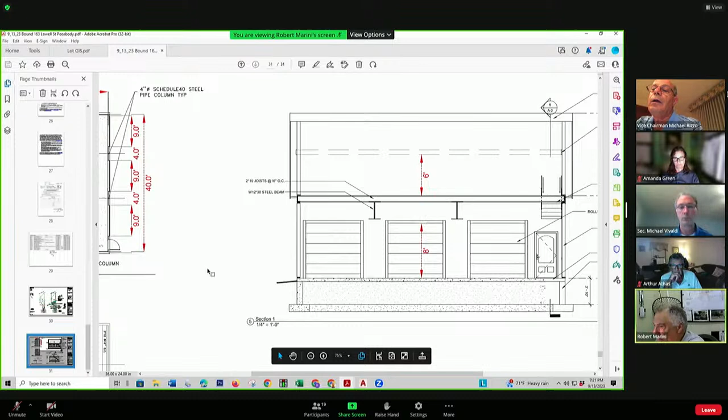Are you going to have roof gutters on the front and back side? No, there's no gutters, but basically it flows down and hits these stone fringes. Okay.

So I guess my only question about that is, in nice weather that would probably work really well. I'm just thinking about in the wintertime when there's snow on the ground, the ground's frozen, and you have some kind of storm event—that water may not get into that stone, those bleeder stone trenches, and could run across. My concern is whether it's running across to the neighbors on either side.

The neighbor on the left wouldn't really get it because there's actually a wall behind there that would direct the water towards the back. But the one on the right—is there a curb or something along that fence line on the right-hand property? Over here? Yeah.

Not that I can recall. So I think you're doing all the right things. But I don't know what would happen in spring thaw when the ground's frozen and you get a heavy rain, if that water's going to go right across into the other property.

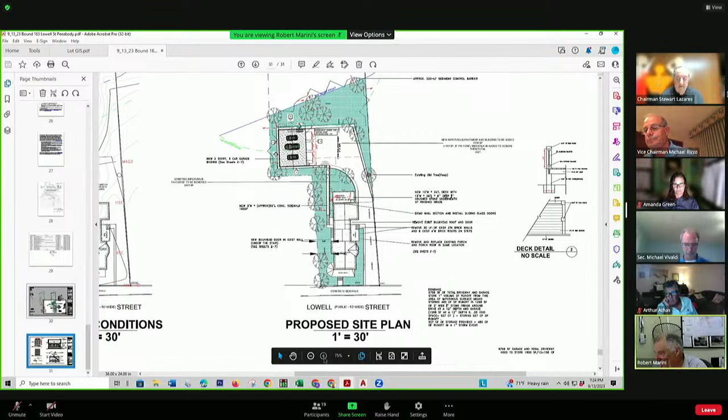I don't know, lately the frost depth hasn't been more than a foot. So what size gravel are you planning on using? 3/4 inch stone, that's basically what they use to surround the Cultec chambers.

But typically what we figure is it's holding 33% void space of the volume. So if you have a chamber and an envelope around it, the chamber's holding water and the volume of the stone around it is holding 33% of that volume. You add it all together at the end. But I just figure stone would work here.

Fine, I could add some grades. Yeah, because when the snow's on the ground and those voids are filled in with stone and then the ground freezes, it's not going to do the job if it rains in the middle of the winter. Anytime in the spring, summer, and fall it's going to do exactly what you said. But I would question if it's going to be okay in like a spring thaw in the middle of January.

Spring thaw wouldn't be bad, but if it's totally frozen and you get a rain and it's iced over, that might be the same thing for a catch basin. The frame could be iced over. It's always best to handle drainage on the surface and not do subsurface drainage, because then you can't get at it, you don't know if it's clogged.

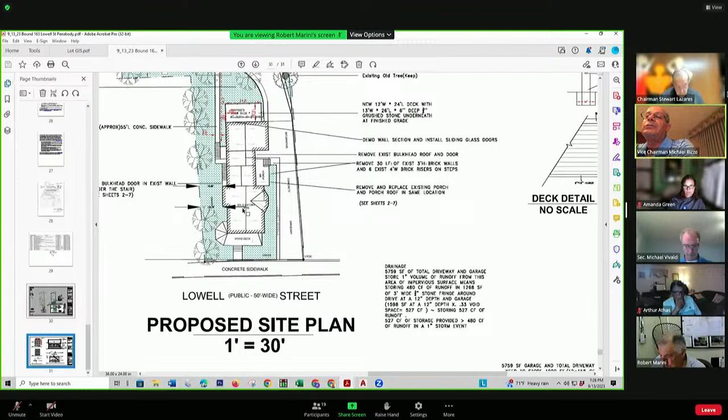Yeah, so I think the grading is what's going to be important. I think you need to provide some grading that identifies and shows that the water's being directed not to either side of the abutters, but directed within the driveway and adjacent to the driveway on the left side and running down to that grass area in the lower area.

So direct the grades away from the garage, away from the neighbors' properties, and then direct it down. It's downward anyway, and it's going to these green areas. It very well might be that the current grades are doing that now, mostly creating that flow.

Yeah, but I'd like to see some proposed grades that identify it. So when the guys are doing the driveway and setting that pavement, I wouldn't want it pitched to the neighbor on the right hand side. I want to make sure it's pitched towards the back, and it can be level at the garage.

It can be leveled, but you need it to come out into the driveway, out in front of the garage, and then move down. So you've got to do a little grading plan that shows that when the guy does the paving, he's going to pave it that way, so it's not all being pushed over.

Yeah, I could add some grades to this. In fact, this line here I'm pointing to is kind of where it meets the existing pavement. And then from there down, establish grades here and base it all around, out, down, and then to here. And then it'll spread out and fill the voids as it needs.

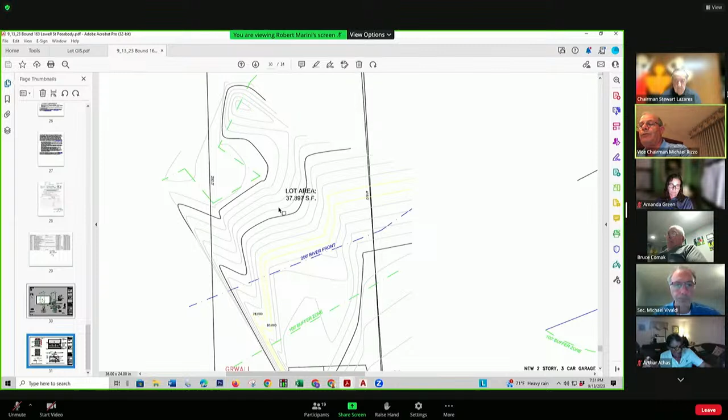The issue there is any kind of drainage of fuel or oil would impact the ground. Not a problem, we want to prevent that. That could definitely be done. And as we talked about, since you're in some buffer zone there, you can mow the grass and spread some grass seed on the bare spots, as long as you don't fill.

When I see a Bobcat on somebody's property, I get nervous, so if you need to do something back there, you need to come back to us for a permit. Correct, yes, that is correct. So they can plow - they just can't use the Bobcat to plow snow and store it there.

I guess the concern was they can't store it on land that's pitched towards the back. They would keep it in the garage, or they can keep it in the garage and in the wintertime bring it out for snow removal, then keep it in the garage, or find another location for it.

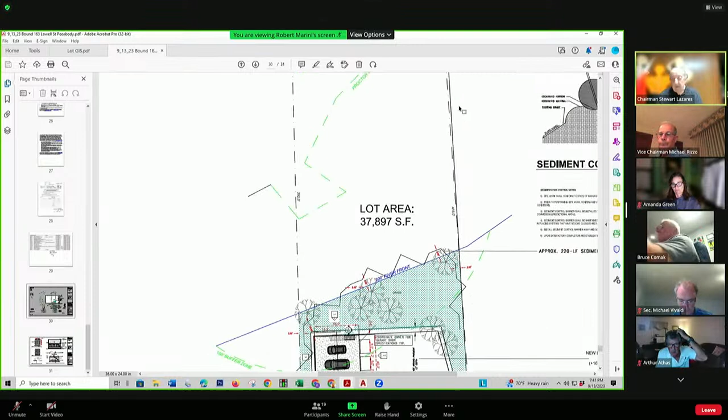My only suggestion is, again, if it'll help avoid runoff, could you somehow trench that area and fill it with stone in front of the boxes? I was thinking of doing that. In other words, surround the boxes with stone, then at least we've done everything we can. And then pitch it, right?

Yeah, pitch it to the back. Show grades, because we're going to be showing proposed grades anyway. Add some grades here, and then show this triangle, this long triangle, this stone here. It's not going to look that great, but with the boxes in there, there's some green. Well, it'll eliminate mowing.

Yeah, but in order to put the boxes, they put underneath gravel, they put wood under, and then they put boxes. So they changed the water flow. But what I'm suggesting is that we do some contouring of the land in front of the boxes and fill that contour with gravel to direct the water flow away from Lowell Street towards the back of the property.

That would be wonderful, if it works, we're fine. But we want some way to fall back on this, if it continues to be a problem and continues to have more or as much water flowing through, because I'll have to add, we had that runoff and washing away of mulch way before all these rains. We had a very dry spring, and it was washing away then.

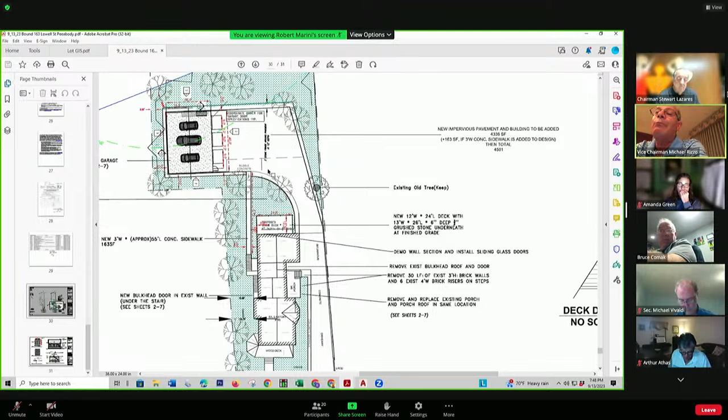Okay, and then the driveway, the big open part of the driveway, be graded such that from the street side, or the part of the garage that's closest to Lowell Street, that whole section with the higher spot would be the edge of the garage, and from there that would all grade back to the grass in the back, but not to the buffer on the right. It's just that it'll be level at the garage opening. Then when the guy paves it, he's going to pave it such that it's kind of like almost like super elevate down in a way, and that can all be shown with contours and grades.

So you're saying, if there's a peak on the roof of the garage, so it's going to be pitching this way. I just wanted to capture it. We could do a combination.

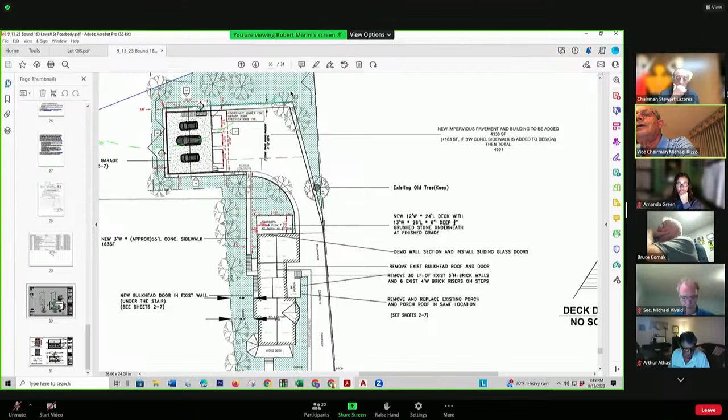So if it's frozen, get it to the swale here, and then end the swale so it dissipates and broadens out. I don't want the whole driveway pitching from the building all the way over to the right-hand side of the property to get to a swale. I don't want that. I want the driveway to pitch to the back.

So you're gonna - exactly. Why don't we do this? Why don't we have two swales that kind of meet here, you're like in the middle. The thing is that's working the buffer zone, so I was trying to avoid that.

We have the stone trench, and the trench is essentially a swale, but it's full of stone. So that's grading this way, and it stops at the middle. So that way, Mike, you don't have a long flow line. It gets to here, and then it diverges to this combined swale.

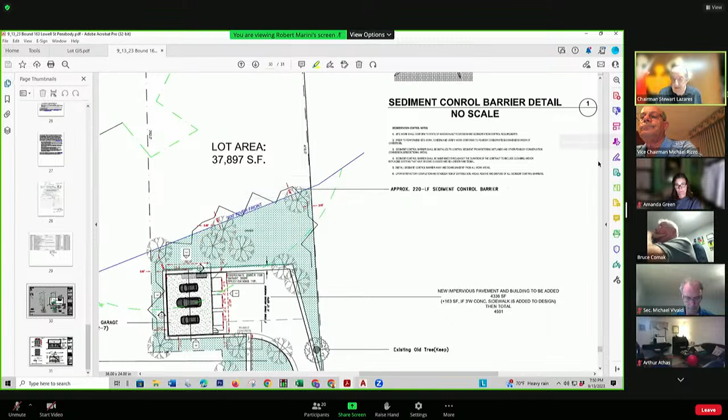Again, the intent is to keep the water flow away from the neighbors. However you pitch the driveway or the swales, it shouldn't send water cascading over the wall to them.

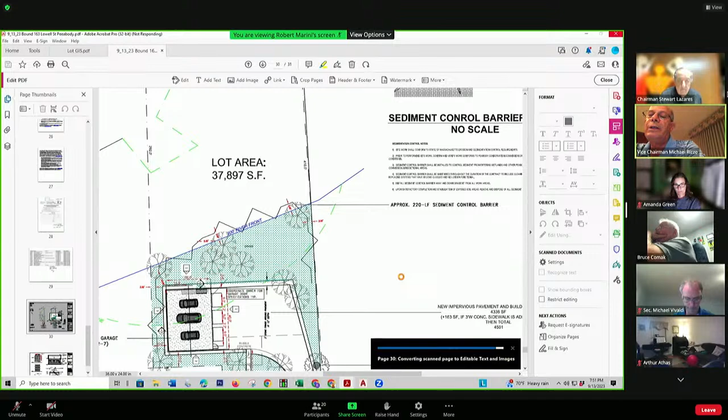So not to keep belaboring this, if you're looking at the edge of the driveway on the triangle side, where the triangle is smallest, heading towards Lowell Street - if that point was elevation 10, going down the driveway you got 10, 9.9, and these grades are just a number: 10, 9.9, 9.8, 9.7, 9.6, 9.5. So at the back corner you're at elevation 8. Along that whole back side it can be elevation 8, and everything from the garage, the front right-hand corner to Lowell Street, those grades are around 8.5, pitching back to 8.

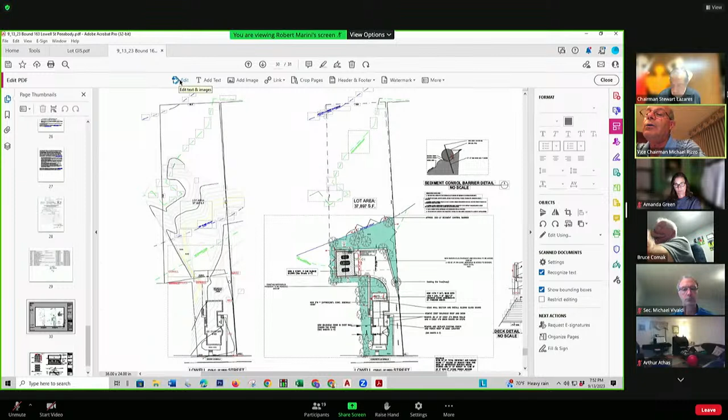Okay, so nothing's going to that triangle. The only thing that's going to that - everything's coming from the triangle. From the triangle, it pitches into the driveway. From the driveway, it pitches in towards the driveway but runs to the back of it. So you're not directing any water purposefully to the right to get into that triangle. Not a drop of water is going to fall and go straight back - it gathers here like this. It's not a big deal, I could just add some grades.

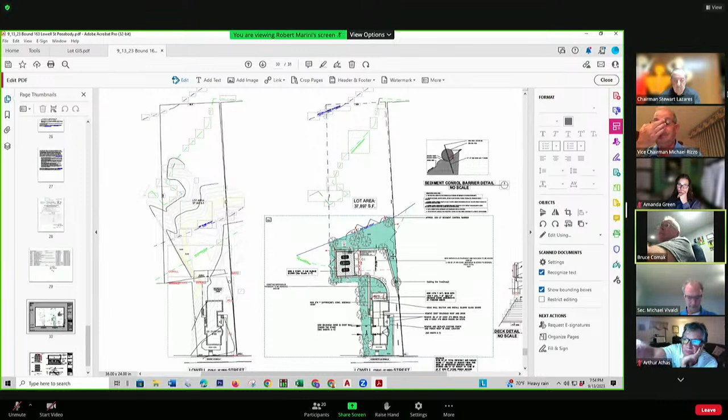And I just want to make sure this is going to be contingent upon - because Lucia's right, it's the people next door, it's contentious, they don't want any water flowing on their property. Again, I don't think it's a big deal to get the water to flow down the driveway and away from their property. I don't either, but that being said, why can't we just wait one more meeting?

Everybody looks at it, and then remember, somebody's going to have to do an as-built on this one to make sure that the elevations are correct. Because you can say yeah we're going to do it according to this, but who's going out to inspect it afterwards? So somebody's going to have to do an as-built to say okay, yeah, it was done per plan.

Yeah, well, that'll be Rob's job to make sure that it's built right. But I'm okay with waiting - I'm certainly okay waiting one more meeting so that gives Rob time to work this out and get a plan to us. Exactly.

So we leave the public hearing open until the next meeting, and then get a motion to continue this meeting until October, correct?

Through the chair, before you make that motion, which I'm supportive of, I'm also supportive of closing it and issuing a contingent order. But if you're now having him make a swale, is he removing the stone around the driveway perimeter?

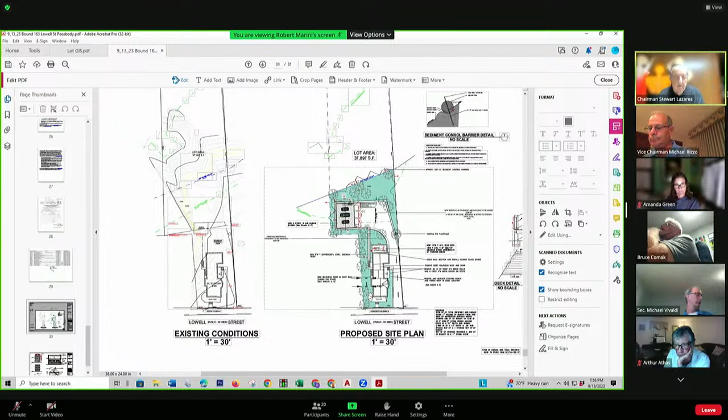Thank you. Okay, where are we? Okay, thank you. You're welcome. Thank you. Dun, dun, dun.

13 agenda. I think items 5 and 6 are going to be continued. Item 5 is definitely continued if you want to read it; Attorney Kelty did give me a continuance letter. I believe for number 6, 60 Pulaski wants to give a quick presentation, because it's been on the agenda and he wants to let you guys see it. Then if you have any issues, he doesn't have to go back to the drawing board after peer review. Okay, sounds good.

Item 5, public hearing on a notice of intent submitted by Attorney John Kelty for Farhat Group, owner of the land, and applicant AGA Foster LLC. Proposed work is redevelopment of a former leather factory for a commercial storage building. The property is known as 47 Tremont Street, map 75, lot 165, Peabody, Mass. We got a letter to continue this, correct?

I'm looking for a motion to continue. Motion to continue item 5 to our next meeting. Second. Roll call: that motion was made by Mr. Rizzo, seconded by Ms. Green. Chairman Lazares, yes. Vice Chairman Rizzo, yes. Secretary Vivaldi, yes. Commissioner Athas, yes. Commissioner Comak, yes. Commissioner Green, yes. All right, so that is continued to October 11th, 6-0.

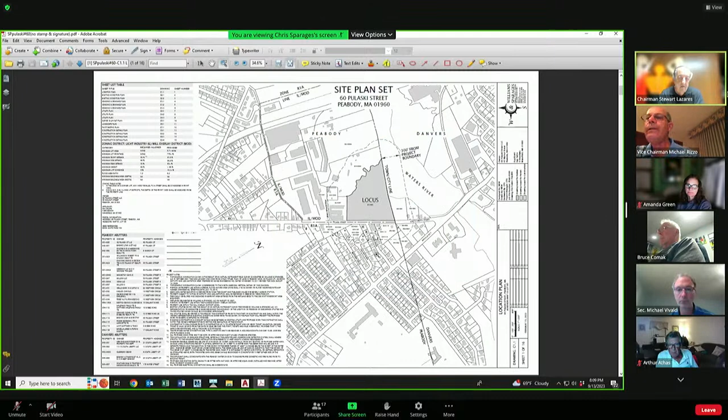This is the locus—the property is right on the Peabody-Danvers town line. Across the street is Dobbs Road, and we have industrial and other commercial properties abutting us on both sides. There's also a rather large residential neighborhood; if you go down Dobbs Road a bit, there are single family homes down here. Just wanted to give you a rough idea of where we are. This piece of land is about 6.7 acres, currently zoned light industrial, and it also has a mill overlay district over it.

It has frontage along Pulaski Street, quite a bit of frontage. You may recall we were in front of the commission back in 2022 with an ANRAD where we confirmed the limits of the wetland resources. That happened back in March of '22.

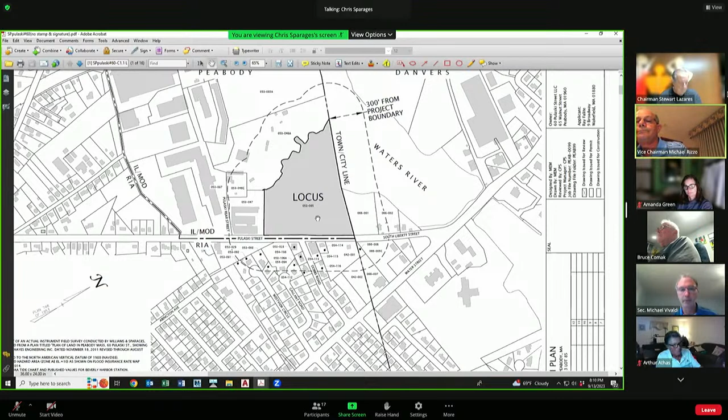This property historically has been used as a slaughterhouse, rendering works, fertilizer company, and tannery. The uses go back to the early or mid 1800s based on our research. Most recently, if we go back just before the year 2000, the primary building was on the property.

If I zoom out and go to the next plan, I'll bring up what we're proposing to do as a quick guide. There was an old building, and there are still remnants of it in the back of the property, that burned back in 1998. But the property is in really rough shape.

There's debris and construction debris throughout the property. It's in really rough shape. We characterize the property as degraded in many ways.

We also have evidence that the operation, the rendering works along the Waters River, is considered to be a historic mill complex. We had a building on the property that existed prior to August 7th of 1996, and it was a manufacturing operation that used water for transportation. We submitted a picture dating back to the mid 1800s showing the factory with a tall ship parked out on Waters River.

So it's got quite a bit of history, and what we'd like to do now is try to redevelop it. Part of the history, towards the latter part when it was used as a tannery, resulted in some contamination on the property, and because of that there have been several evaluations and environmental site assessments.

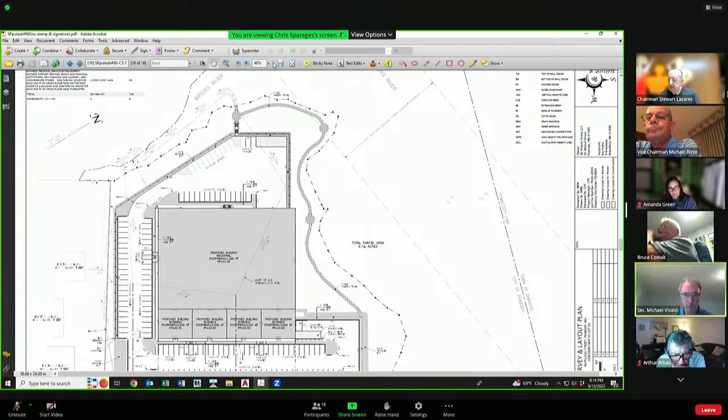So that's a little bit about the existing conditions. Just to refresh your memory about the wetland resources, since that's why we're here before the Conservation Commission: we're on the Waters River, and there's also an intermittent stream that comes through the property from drainage on Pulaski Street on the north side. We also have a bordering vegetative wetland along the Waters River.

Waters River has a mean annual high water line that we established when we did our ANRAD, determined by elevation since this is a tidal river. We have that information shown on our plan.

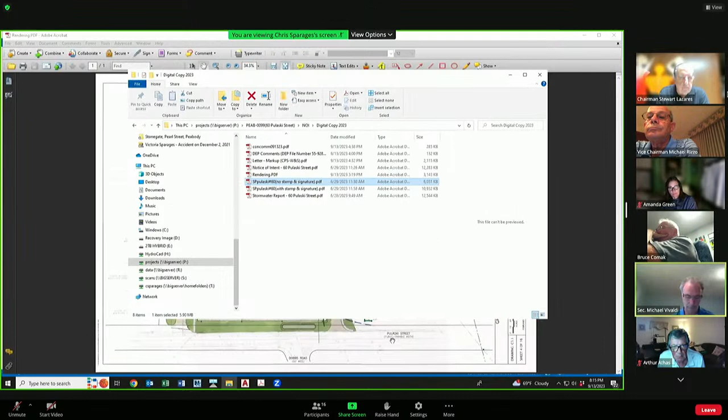If we continue going upstream a little bit — let me change my screen — can you see the color drawing now? Okay, so on this color rendering, the green line I was tracing on the other plan is the limit of the bordering wetland. You can see the edge of the mean annual high water, at elevation 4.1, a little further out — that's this blue line.

We're also in an area that FEMA has designated as a special flood hazard area. It's a tidal situation, so it's a coastal wetland resource area known as land subject to coastal storm flowage, to elevation 10. We've also shown that on the plan as a coastal flood hazard area.

Can you make the screen bigger, please? Sure, let's zoom in a little bit here. I'm a little confused, there are a few lines here, right? The blue line at the upper left, is that a river?

Let's start with the colors, the furthest ones away. From some survey maps, this light blue line is considered the thread of the river on some old plans. That's in the water, so we don't really pay attention to this one. It was just a line shown on some survey plans.

Then we have a darker blue line, this dashed line. That's the actual edge of the mean high water, so that's the edge of the river, if you will. And of course, that edge of river has a riverfront area associated with it that extends 200 feet from this line. You can see coming way back into the site here, that's 200 feet from that mean high water line.

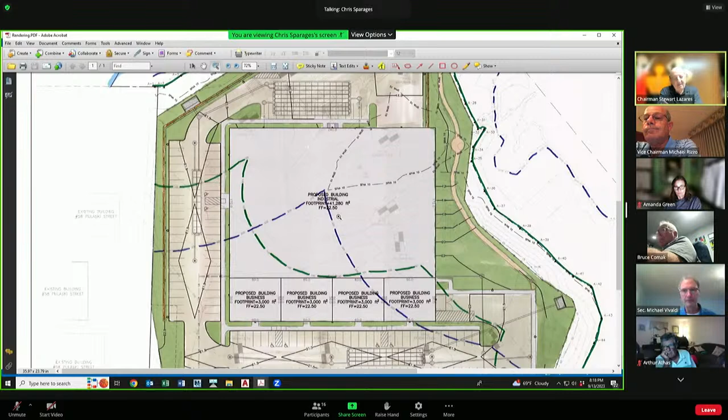So the only other thing I wanted to mention about the existing condition has to do with the status of the riverfront area. Now, I mentioned before that we believe we're exempt from the Rivers Protection Act because we're designating this property as a historic mill complex. But even though we're saying that, we are doing our best to honor work in the riverfront area.

You'll see what I mean when I present the extensive riverfront restoration plan that we're proposing for this property. The riverfront area is very much degraded, but we're proposing to clean it up and revegetate it with native trees and shrubs, and I'll go into that in a little more detail.

So the proposal is the plan that you see before you. It involves removing all of the old debris and junk and construction materials that are strewn throughout the site, especially within the degraded riverfront area.

And then the proposed development involves a commercial building. It's this gray square. At this time, the mill overlay district allows us to have multiple different types of uses, but for now, what we're proposing is an industrial use and about 41,280 square feet of the building in the back. Out front, you can see these 4 squares of 3,000 square feet of space for proposed business uses in the front of the building.

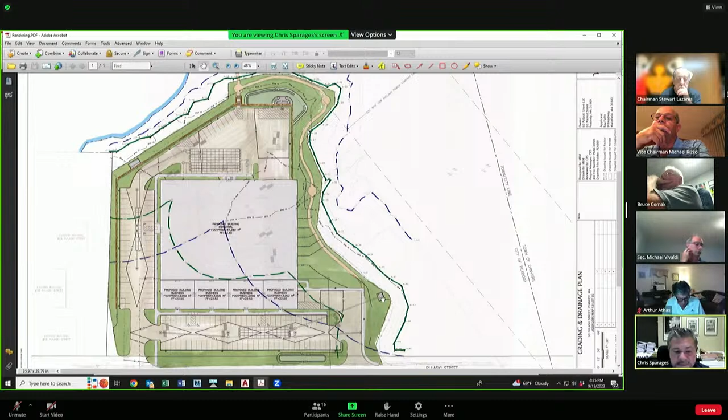In addition to the main stormwater management areas, we have to get the water there. So the rest of our system includes other best management practices, typical things you see on other projects: deep sump catch basins, sediment trap forebays—that's this guy here, where the water falls in first before going into the rain garden. Then at our discharges, we have a couple of them here, and over here we have large level spreaders designed to handle the rate of the water coming out. We actually size the rocks to make sure the water coming out of the pipe doesn't move them all over the place.

So that's my quick presentation—hopefully that was quick enough for you. I'm here tonight to answer questions and ask you what you think about what we're proposing here.

Thank you very much. I think that your presentation was excellent. You covered a lot of areas and questions and supplied answers that were relevant.

I have one question: just because it is in a neighborhood, is there any plan to put solar panels on the roof?

Let me take a step back. At this time, we don't know exactly who the tenants are going to be, and in terms of architecture, that design detail hasn't even been thought about yet - in other words, how we're going to heat or provide electricity to the building. So I'll bring that question back to the owner of the property, who's also the developer, and we'll see if that can become part of the project.

I assume you're asking because you'd like to see the project use solar panels if possible. Yeah, I think the future is going to require alternative sources of energy from what we currently have, and electricity plays a big part in it. Admittedly, at this point, my understanding is you can generate electricity from a solar panel, but you have to store it someplace, so your system would require battery backups and the ability to hook up to the PMLP grid, supplying power to them or taking power from them as needed. But I think it'd be important for the environment if we could incorporate some non-fossil fuel means to generate electricity.

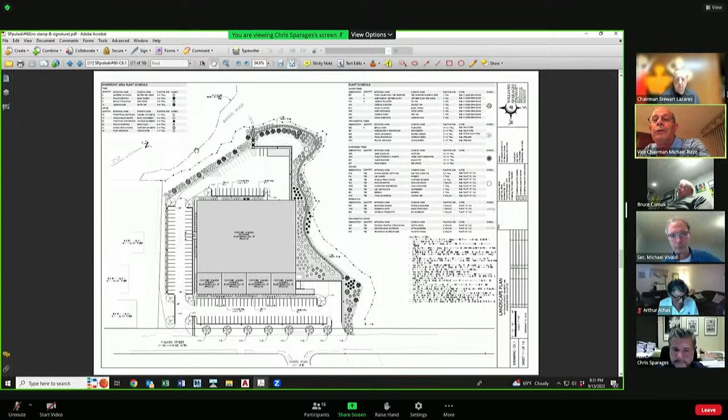So in the spirit of that, if you go back to the other drawing, the color drawing, you can see it better with the blue line where the canoe launch is. To the left of that, I don't see any public access, and to me every foot of access to the ocean for our city is important. Is there any way we can do something so we can enjoy all that footage and not be cut off with that back section?

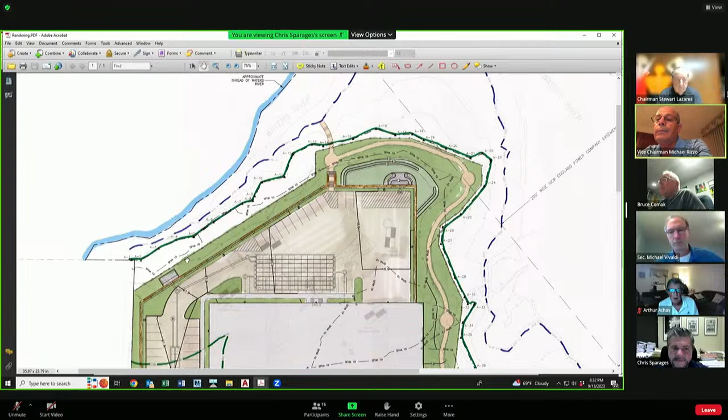Sure, so you're talking about this area, obviously. Yeah, yeah. So I will bring that back to the team, I understand why you're asking. It's relatively flat in there too - we kind of picked the path to follow a relatively flat area. So let me go back to the owner and see if they'd be willing to extend it into this area. Okay, and hopefully connect it back to Pulaski Street.

You mean to do a loop, if you will? Yeah, well, find out, because I think it's important. I haven't asked for the sand beach yet and the palm trees, but as we get... so as we haven't...

That was a good presentation. Thank you. But we haven't discussed whether it's our duty to try to restrict any construction in the inner or outer riparian zone for the river. But certainly demonstrating, helping to provide an opportunity for the public to have enjoyment and some use along the water there. With regards to regulations, I'm just not positive at this time what the rules are for inner and outer riparian zone disturbance in the floodplain and this tidal area.

But I certainly am thrilled to see something starting with that. Maybe at the next meeting we could get more into the regulation that explains what you're doing. Sure, I'd be happy to. We do think long and hard about this stuff. It takes a lot of time and effort to put together a plan set like this. Yep, I know we don't take it lightly. We believe we have very good arguments to explain how we comply with the regulations. We'd be happy to do that. That's great.

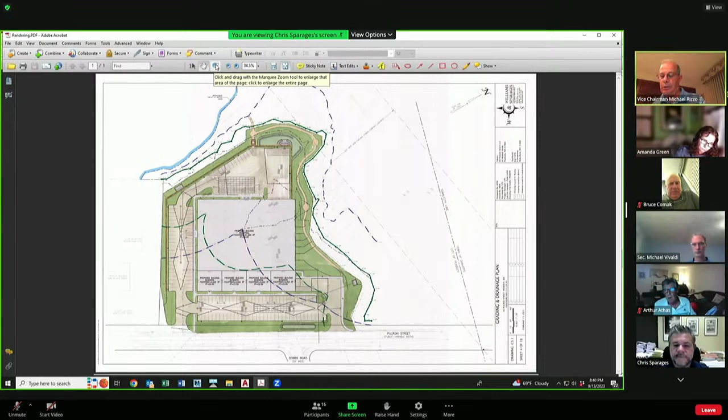I'd like to make a motion to continue this to our November meeting. Seconded. Roll call: the motion was made by Mr. Rizzo, seconded by Mrs. Green. Chairman Lazares, yes. Vice Chairman Rizzo, yes. Commissioner Athas, yes. Commissioner Comak, yes. Commissioner Green, yes. Secretary Vivaldi, yes. Okay, great, 6-0.

Thank you, Chris. All right, we'll see you soon. Thank you.

Moving on, let me get this up. Number 7, I believe, right? Item 6, request for determination of applicability. 6, 7 - we just discussed 6? No, 7, yeah, we just discussed 6.

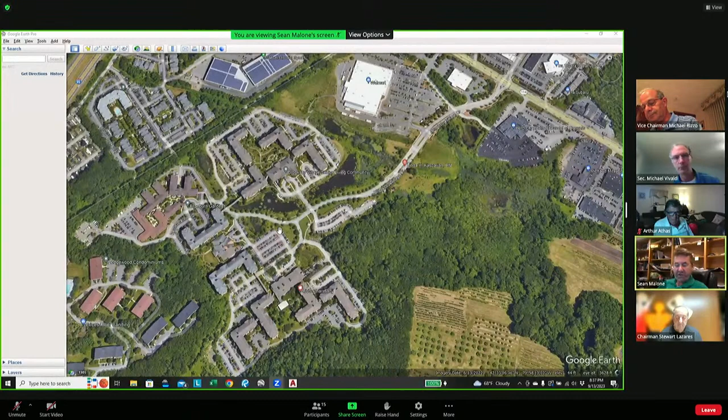This is Brooksby Village - I'm sure a lot of people, if not everybody on the commission, is familiar with it. It's approximately 90 acres, with approximately 16 buildings featuring various care options: independent living, assisted living, and nursing home facilities. The site was constructed with a couple of wet basins - this one here is known as Upper Basin, this is the Lower Basin. The water flows, stormwater flows into this basin, weir-controlled underneath this bridge crossing into the Lower Basin.

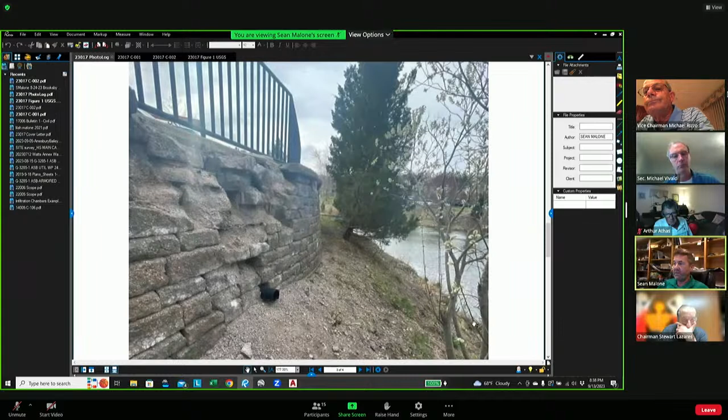So obviously, we want to fix this as soon as possible to prevent a more catastrophic failure, which could then push sediment and debris into the pond.

So the proposal is to remove this existing wall as well as the concrete sidewalk surrounding it. As a first order of work, we'd install a sedimentation barrier around the limit of work. This would consist of a compost filter sock as well as a silt fence backing to give a good solid barrier. All the work would be done from this parking lot area. We don't anticipate the need of any equipment going down into the grassed or vegetated area, so all work would be from the paved surface.

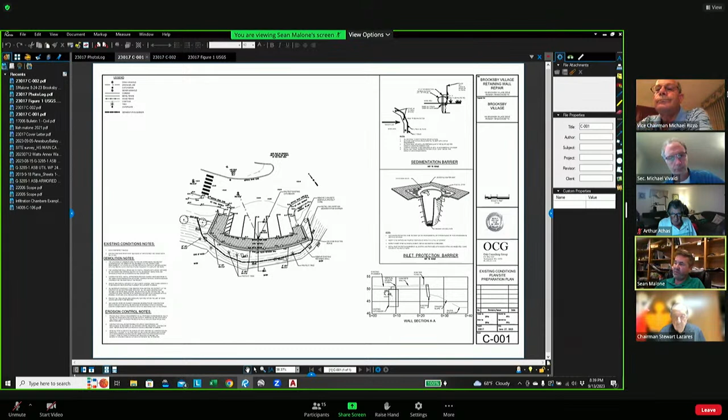Just a quick section showing there's about a 5-foot high wall here. We would then propose to rebuild the wall in essentially the same footprint. It's actually a little bit smaller footprint when we straightened out these walls, so we're a little bit less impervious area than the existing condition. The wall would be constructed and then infilled, and the concrete walk and fence would then be replaced, again, all work occurring from the high side.

We'd be changing the wall material from that small block that was disintegrating to a larger gravity wall. These blocks are about 4 feet wide, 2 feet high, and really give a good sturdy, robust wall that'll be durable. Another attractive thing about this type of wall system is it can be constructed very quickly. You don't have to worry about tie-back geofabric. It's place the blocks, get all one layer set, backfill, and keep on going. It's kind of like building Legos, if you would.

The total area of disturbance is approximately 2,000 square feet. We do anticipate we'll have some disturbance of this vegetated area on the low portion of the wall, just to construct the wall itself, and that's reflected in where the sedimentation barrier is located. But after the wall is constructed, we'll reloam and seed all disturbed areas and cover with a biodegradable erosion control fabric rated for the steeper slopes.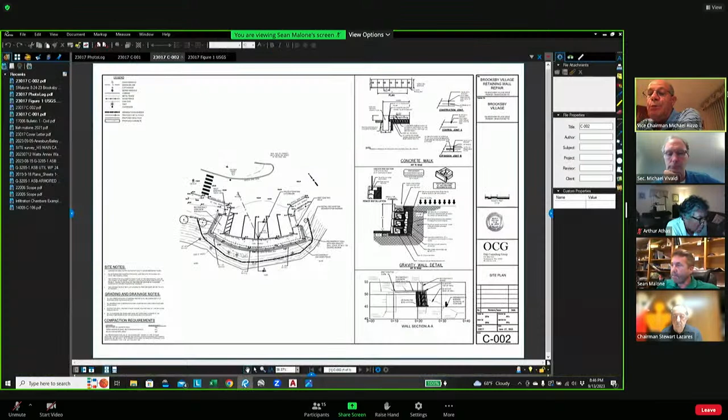Clarify if I'm incorrect, but those blocks have cavities in them that are filled with stone, and then the next piece goes on top of that and it's filled with stone too. So the wall is actually permeable, meaning any groundwater from behind the wall can get through. It's not like a gravity wall holding water back. It works great, these types of walls are awesome. That's exactly right, Mr. Vice Chair. This section shows the stone backfill in between the blocks.

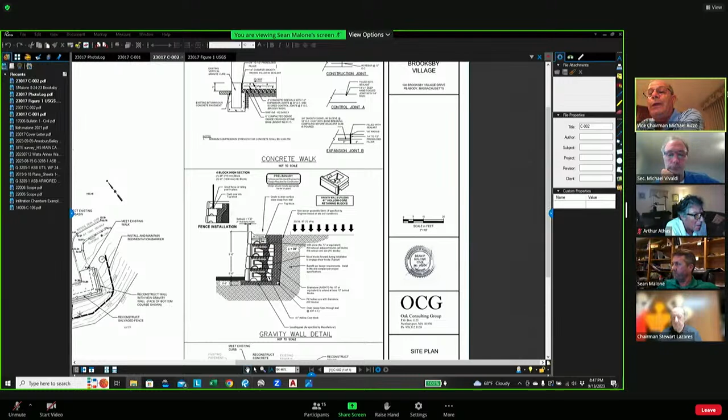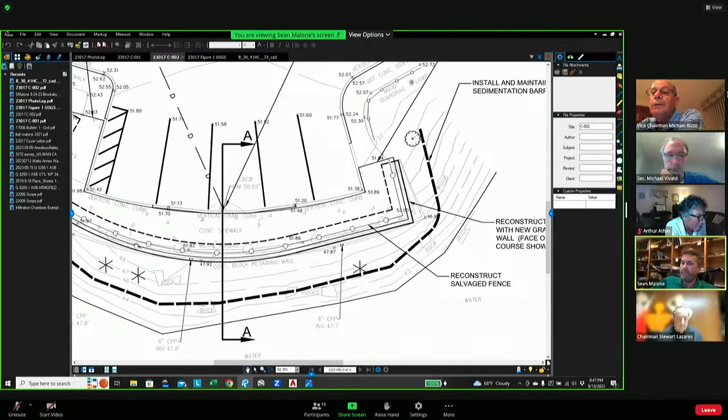Excellent. Will there be, at the back side of it where you'd be parking, a guardrail along there so people won't drive over? There is not a guardrail present. There's a fence, and the sidewalk is approximately - there's a vertical granite curb, and the sidewalk is about 6 or 7 feet wide, then you've got a fence along the edge of the wall. Okay, very good. Yeah, these are nice systems, they work really well.

Anybody else on the commission have any questions? Is there any information, anybody from the city? Any comments and staff comments? I don't know of any. There should be a memo from Mr. Langley in the OneDrive, and then I gave you guys 2 recommended conditions.

We have 12 to 18 inch on the filter sock diameter. You could double those if you wanted to - you can put one behind the other and double up. Yeah, that'd be good.

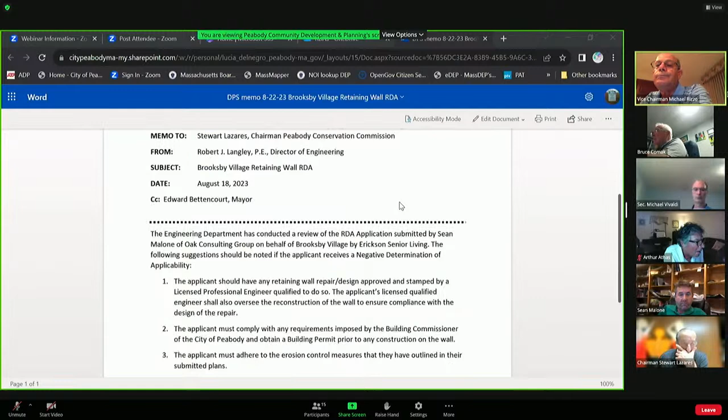So I pulled up this plan that has been on the OneDrive probably since like August 18th. So we'll just include these comments. The recommendation is that the applicant - there should be stamped plans signed by the engineer, plans by a licensed engineer.

And you have to get a building permit with the building commissioner and the engineer, and erosion controls. So we just got the erosion controls covered. We use 18-inch erosion controls. We'll double up one behind the other and include the comments from DPS, and we're good to go.

Through the chair, there's no silt fence? I think there should be a silt fence besides the log. Yeah, Mr. Commissioner, our detail shown on our plan does show the log backed by a silt fence. We saw both. All right, so including a silt fence.

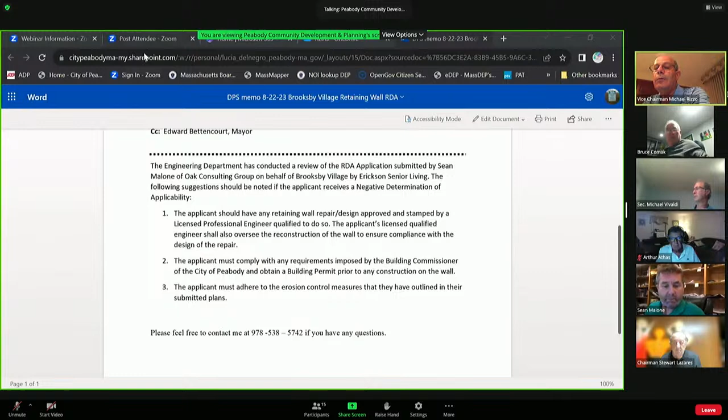Do you mind sharing that again? I'll stop sharing if you could share that detail again, just so that we all know that it's there. Sure. And then I just had two recommended conditions, and they're extremely basic.

It was about the erosion control. So whatever you guys want to word it, they need to be inspected and approved before work can commence. The erosion log should be the larger size of 18 diameter if feasible, or if you guys want to do the 12, and if there is the silt fence, if you guys think that's acceptable, that's fine as well. I just think 12 inches is really not that much. Once you get rain and weather, they smash down pretty fast.

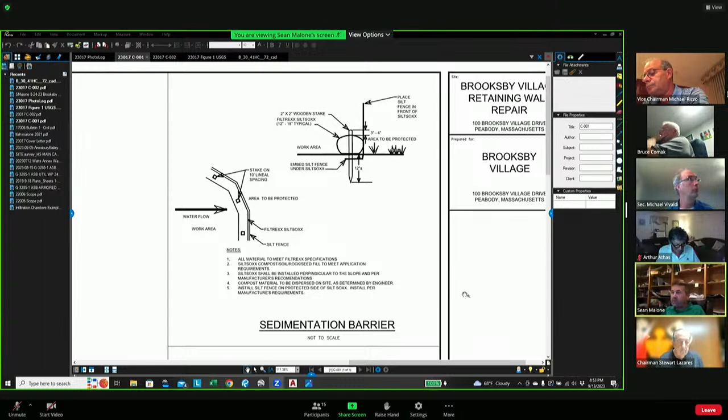So a silt fence is also required due to the close proximity of the wetlands. The catch basin shall be protected as shown on the plan. I thought I saw something, but if not, catch basins need to be protected. Yeah, I wrote as shown, so I think you do.

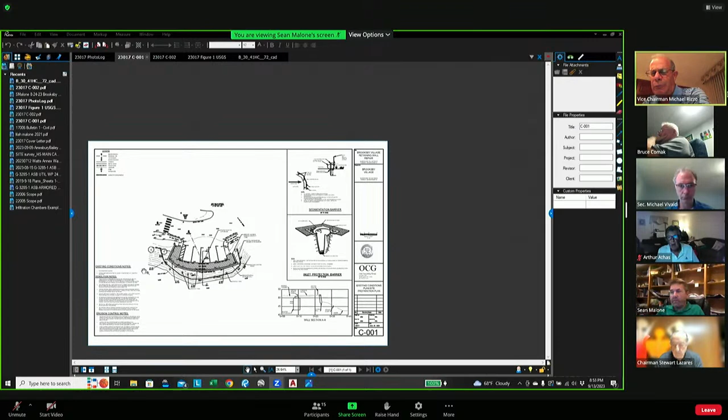And then my second condition was, once the project is complete, an email with pictures should be sent to the Concom staff. A site visit may be necessary to confirm work was done in compliance, and then add any DPS conditions or any conditions that the Concom deems appropriate. And add the condition that once the erosion controls are in place, Lou should be notified so she can come out and look at them.

So moved. Okay, has this been, has the public had an option to speak? I believe there was nobody there. Oh, okay. So I'll make a motion. I would just say that if you are in the public and you wish to speak, please raise your hand.

Just because people get a little confused with online still. I don't see anyone raising their hand. But anyway, I'll make a motion to close the public hearing.

Wait for a second. Second. All right, motion to close made by Mr. Vivaldi, seconded by Mr. Rizzo.

Roll call. Chairman Lazares, yes. Vice Chairman Rizzo, yes. Secretary Vivaldi, yes. Commissioner Athas, yes. Commissioner Green? I don't see her. Commissioner Comak, yes. Commissioner Green? You're muted, Amanda. I don't even see her. Maybe she stepped away, Amanda. Turn your microphone on. She might have stepped away, so it should pass over her. 5-0 with Amanda not voting, not present.